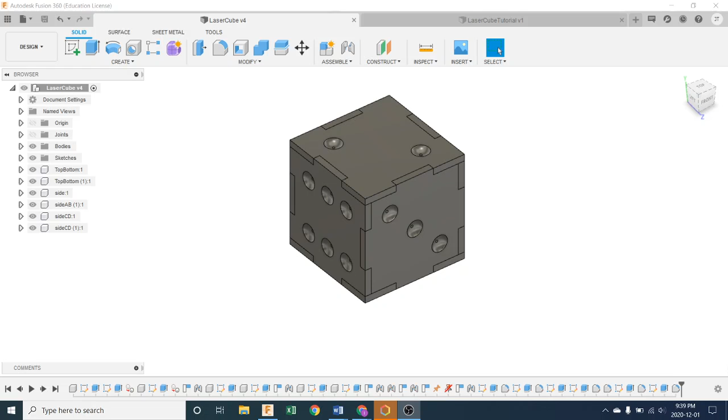This die is 2 inches by 2 inches in size, and it's got the 6 sides with these little finger joint connections that we're going to draw. In the end, it'll just hold itself together.

So where do we begin? Let's start a new file, which I've already started here, but you would go up to File and New Design, and save it like I have, even though it's blank, so you can constantly be saving and won't lose any work. Mine's called LaserCube Tutorial, and I've got this blank space.

There's many ways to draw most things, so the question is where should we start? This is where I think we should start. First, we're going to just draw a regular 2-inch by 2-inch cube that we should already know how to do from the basics tutorials and the previous assignment.

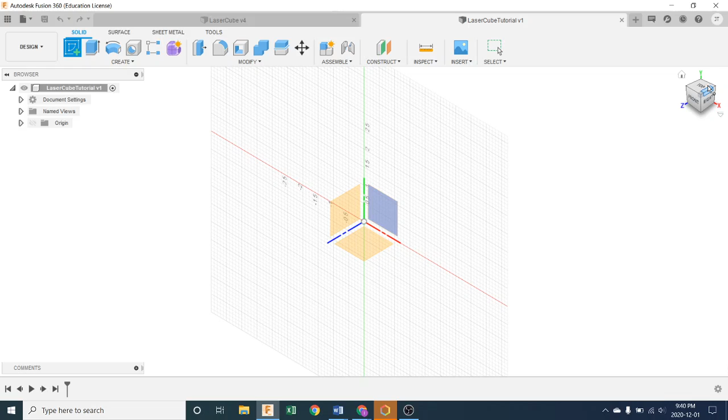Let's do that. We're just going to hit create a sketch, referencing the top plane, which would be this one, and click that. Now we're looking down, so we'll create a rectangle. It's a center point rectangle to keep us on the origin. We'll drag out and punch in 2 in the box, tab up, 2 it is, and enter.

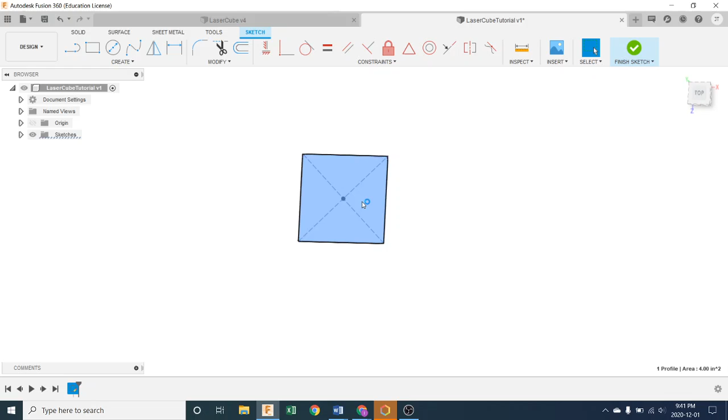Now we'll click the center and hit E for extrude on the keyboard and drag this up to 2. I'll enter 2 in the dialog box here - oh, I'm going to grab the whole thing. There we go, 2, enter.

So I now have a 2-inch by 2-inch cube, and I thought this was a good way to start because we can use this as reference as we draw the sides. We'll basically draw what we need to on this cube.

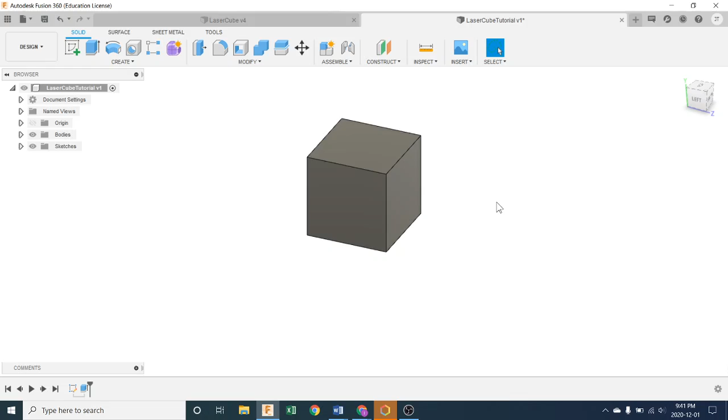So we're going to start with the top. We'll click the view cube here so we're aligned on the top, and we're going to create our first piece here. Now this is our first foray into multiple pieces, and in Fusion we call those components.

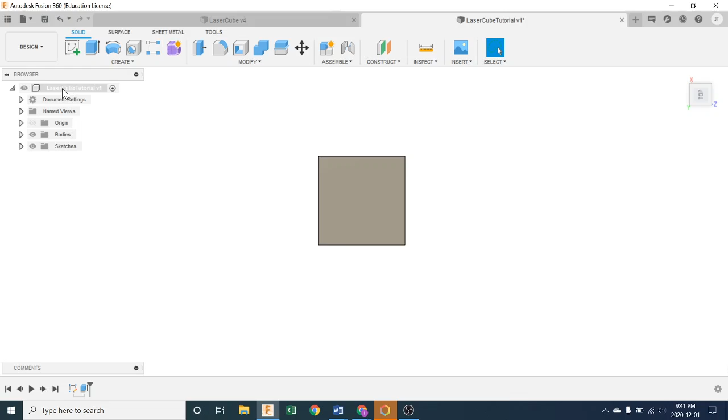So we're going to have 6 different components that will come together to make this cube. We'll start by making our first component, heading up to the top level of our project, right clicking and creating new component. A dialog box comes up where you can name your component, and we'll just name ours 'top' and push OK.

Over in the browser tree on the left, it says top, and that's our component. Now here's the key to components.

When you are drawing anything to do with this component, the top, you must have this little radio button selected - it says activate component. That will ensure that all sketches and all bodies you create while drawing this component are stored underneath this component. Currently there's just the origin under there if I expand it.

The mistake often made by people new to this is they will start drawing, even though they've created components, without this activate component button on, and then all the bodies and sketches are not associated with the actual part itself.

So we're going to go back and activate top like that, and now we're going to draw our first part. You can do a finger joint many ways. I've sort of pre-thought this, and the way I think we should do it is first we're going to draw on this surface right here.

Click on the surface of the cube we drew previously, and we're looking at it now. So even though we haven't drawn anything yet, we can see the previous cube. If I go up here to the bodies and turn that off, it will disappear, and I can turn it back on. The sketches, I can turn those off too. That's the previous cube we drew, and we're going to use it as reference. When I hover over it, you can see it highlights.

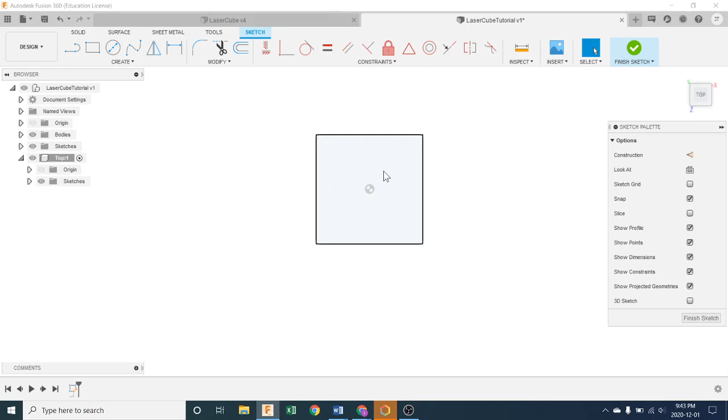So the first thing we're going to do is draw an outline. Click this 2-point rectangle, grab this corner, and this will be the outline of our piece that we're making, the top piece.

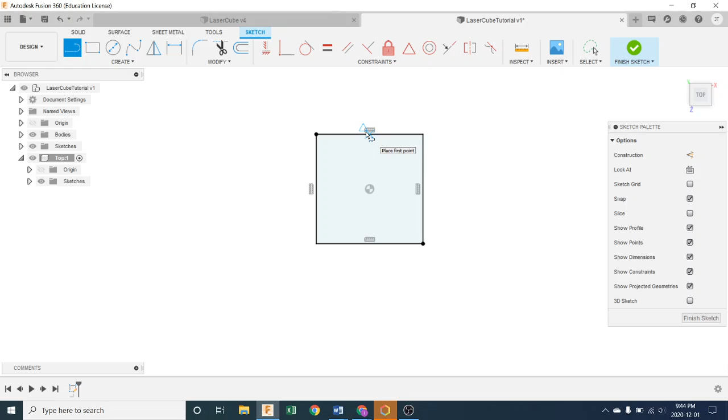Now the next thing we're going to do is create a line, down the middle. If I hover along this line, you can see I have an X, meaning I'm referencing the line. If I move far enough, it'll change to a triangle, meaning I've found the middle. I'm going to click there, then head down to the bottom, and notice another triangle appears. Click there. Now I have a center line right down the middle of this.

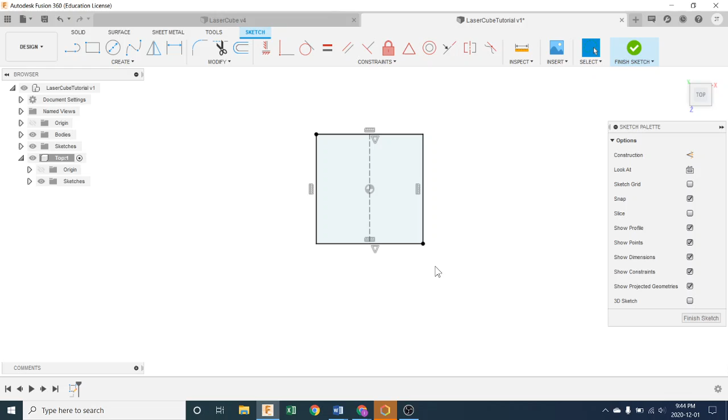This is just a reference line for me, so I'm going to click it with a regular mouse click, then push X on my keyboard, and notice it turns into a dashed line, also known as a construction line, as you can see in the sketch palette. I can also turn it on and off by picking it and clicking this little button, which would change it back to a normal line. A construction line is only used for construction purposes, and it isn't actually part of the object, meaning it won't be printed out, or in our case lasered out.

So there it is, I'll need it for my next step. My next step is to create my first receiver for a finger right here, and that receiver is going to be 3/4 wide.

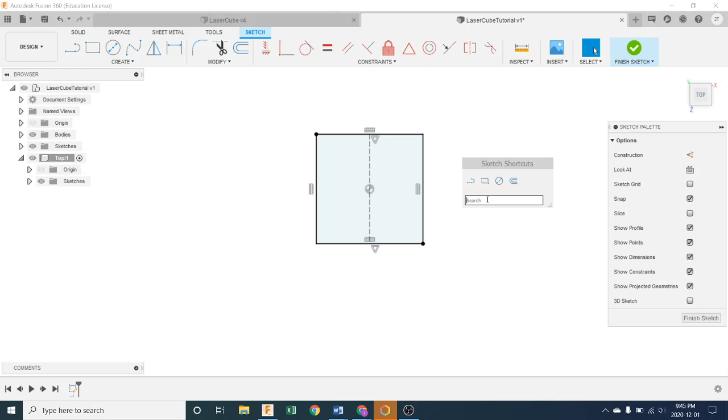So I'm going to push S on my keyboard to bring up the shortcut menu, and type OFF for offset. That's what I'm looking for, this offset - the one that's got 2 lines, not this one here, which is like a 3-dimensional offset. This is the one you want.

So we'll click that, and then we're going to offset this line. How far over is it going to be? Well, it's going to be 3/4 of an inch, and half of 3/4 would be 3/8 of an inch. But if that's tough, what you do is this: you go 0.75 for 3/4, divided by 2, and you'll find out Fusion can do math for you. Now it's figured it out - it's taken 0.75, which is 3/4, and divided it by 2. And we can push OK.

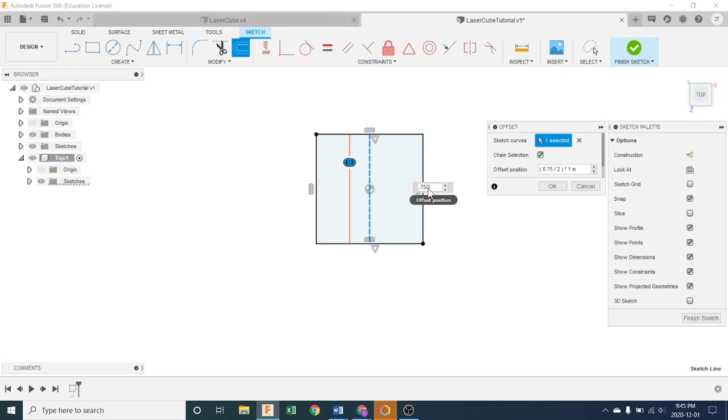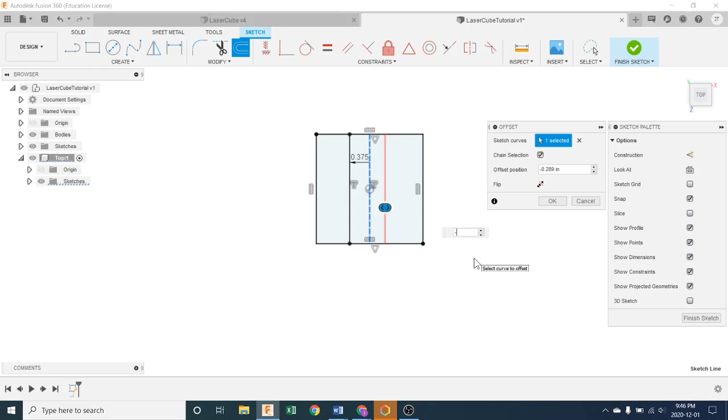So that's the line I want right there, and notice it's giving me the dimension. Now I'm going to offset the other way: S for shortcuts, OFF for offset, click that one, pick this line - that's my line that I picked - and now I'm going to pull it this way. Notice I get a negative sign because I'm headed this way. Again, we're going to go negative 0.75 divided by 2, enter. So now I have 0.75 divided by 2, plus 0.75 divided by 2, add them together, you get 0.75.

So my next step is the thickness that I'm going to create, which is the thickness of the material we're going to be using for the finger joint. So I'm going to create another line that comes down here - I'm just going to draw it any old place. I'm going to hit L on my keyboard, or you can pick this up here. I'm going to hit L on my keyboard, then click to this line.

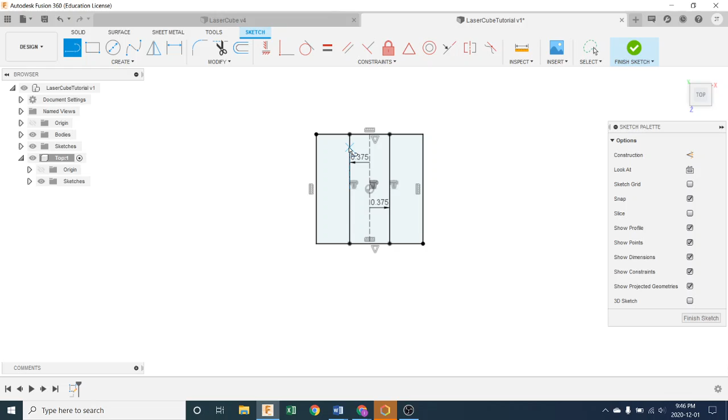Make sure you get an X, come across, make sure you get that 90-degree symbol right there that says box, or it's a little box that says 90 degrees. That's good. We'll just do one. Hit escape.

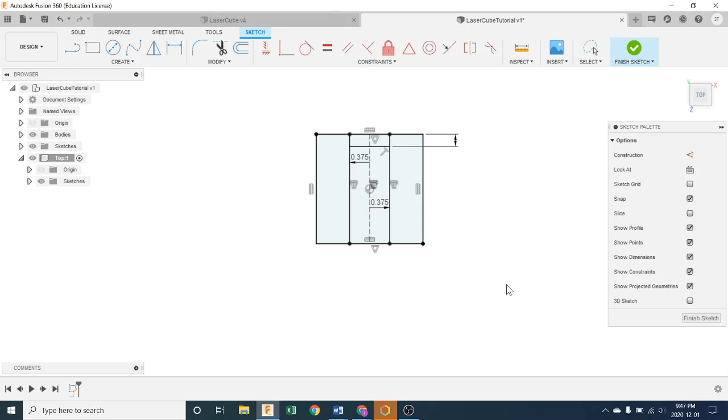That line is not in the right place. So I'm going to push D on my keyboard, and notice my mouse cursor now has something that looks like a little arrow and bars, like dimensioning. I'm going to pick this line and pick the edge of the cube, drag to the right and click. Now I get to tell that line how far it should be from the edge of the cube, and it should be 0.125, or 1/8 of an inch away. If you don't know your decimal conversions, you can just type in 1/8. Push enter, there it is. So that line is now dimensioned, or constrained, so it has to be 1/8 of an inch from the edge.

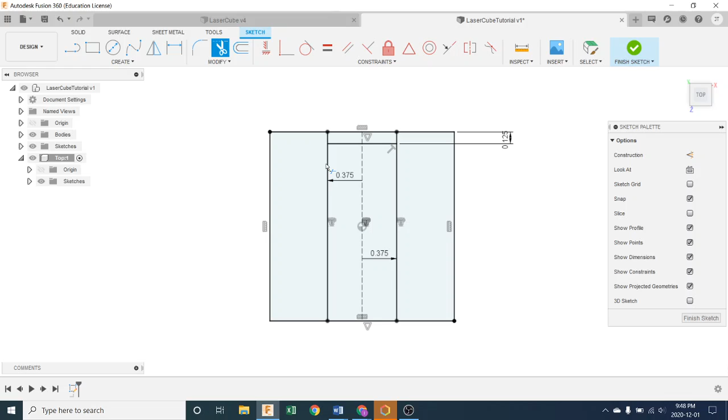Now we're going to trim these lines here because we don't need them. Notice I'm still dimensioning — if you look at my mouse cursor, I have to hit escape to get rid of that, and now I'm not dimensioning anymore. Up here we've got some scissors, I'm going to pick them — that's trimming. We're going to trim this line, and this line. It highlights what's going to happen when you hover over it. Now I just have this area here. That's good, and I want that on 4 sides.

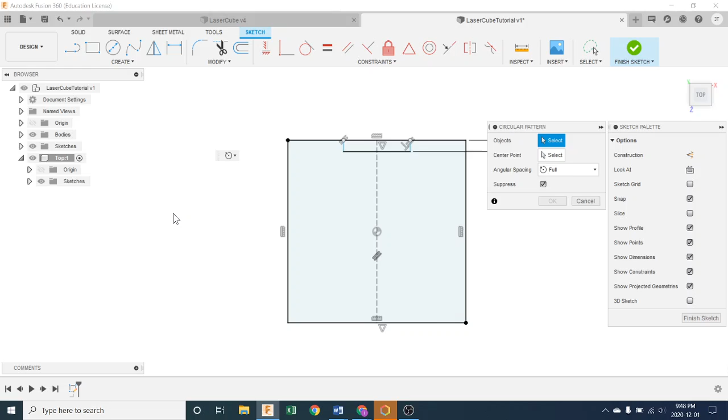So I could draw it 4 times, or I could head up under Create and choose Circular Pattern. It's misleading because you think it's going to make circles, but it doesn't — it makes patterns in a circular method.

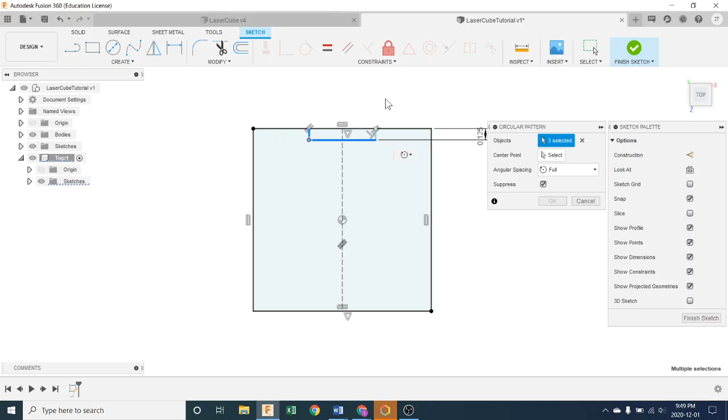So we're going to pick the object we want. If I click up here and hold and drag — oh, that's good to show you — that was supposed to be a selection tool, but it's weird. So head over here under Select, and you can select in different ways. I like the window selection, so I can just drag and pick all these objects. Notice it says you picked 3, and that would be these 3 lines. The other way to pick them, if I cancel this, is to hold shift while you individually pick all three. You have to hold shift to pick multiple things. Now I've got 3 objects.

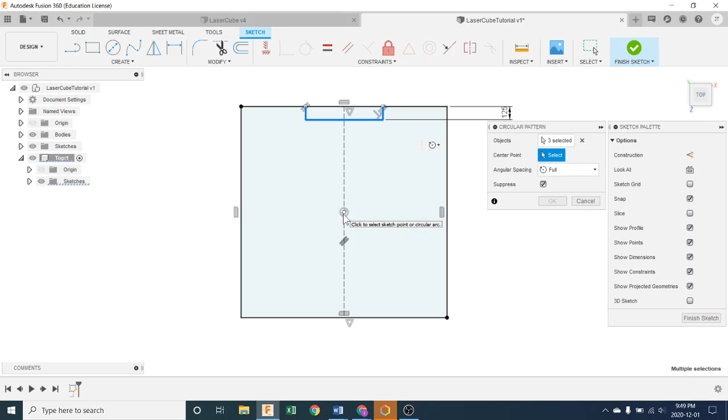Okay, I need to pick a center point for rotation. So I select it, I run along this line here — there it is, center point right there, that's the center of my cube. Now it's making them here and here, but it's weird, and that's because I've only got a quantity of 3. I need 4 — if I push 4, push OK, I have 4 of them now. So I'm ready to go.

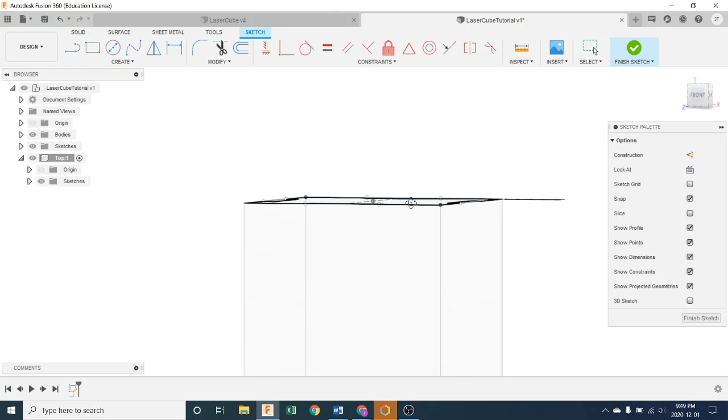So this is supposed to be cut away here and here and here. Remember, I've only made this sketch — it's 2-dimensional, not 3-dimensional yet. So we're going to pick the center like that, and we are going to extrude by pushing E on the keyboard, extruding it into our previously made cube, the distance of the material we're using, which is negative 0.125. Enter. Okay, so there's our first side, that is the top side.

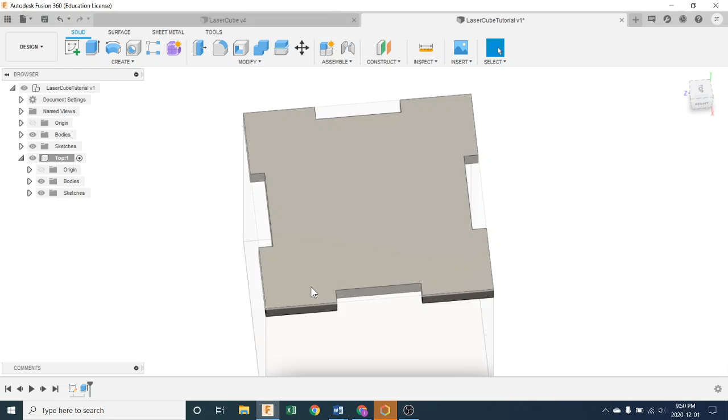And that is our first video. In the next video, we're actually going to make the bottom side and do some joinery. So there's our top side, all drawn. See you in the next video.